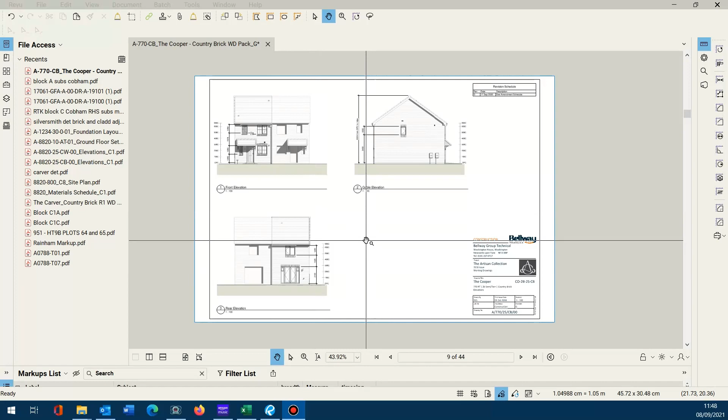This is the second in a series of demonstration videos that show bluebeam practical uses. I won't show you the whole process, just the pertinent bits, but suffice to say I'm doing a takeoff on a housing scheme. I'm going to take off this particular plot type. I won't show the whole takeoff, I'll pause and come back to the next section shortly and then explain from there.

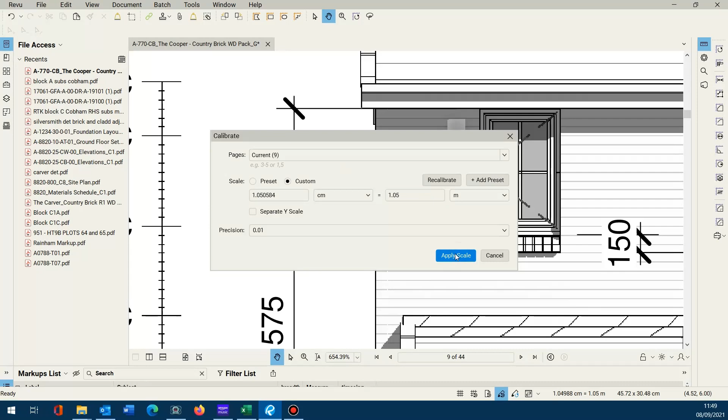So let's just get going with our takeoff, calibrate. The point of this video is to show you how speedy taking off with bluebeam is, and how speedy it is to get the output that bluebeam produces into a spreadsheet for you to then further manipulate. I'll come back to the rest of the takeoff once it's done. But here we go with taking off this house type. I'll see you in a couple of minutes.

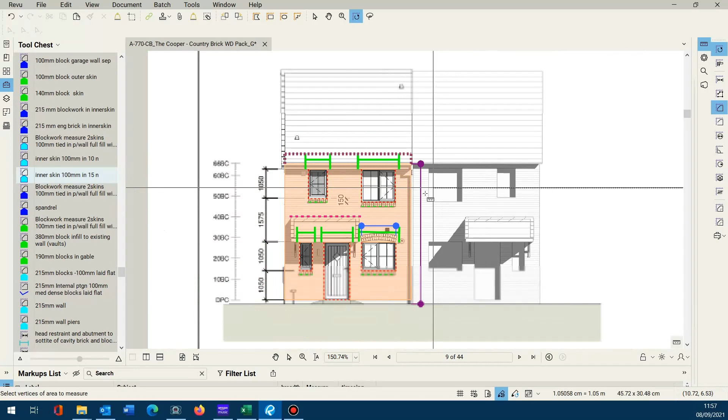Okay, so when I paused, the clock was at 11:50. It's now 11:57. So in that time, I've been able to measure up the facework, cut out the windows, measure the closers, measure the lintels, measure the sills, cavity trays, feature arches, wall plates, fire barriers at party walls, meter boxes, and it's all speedy because I've got the preset tools here, as I've explained to you before.

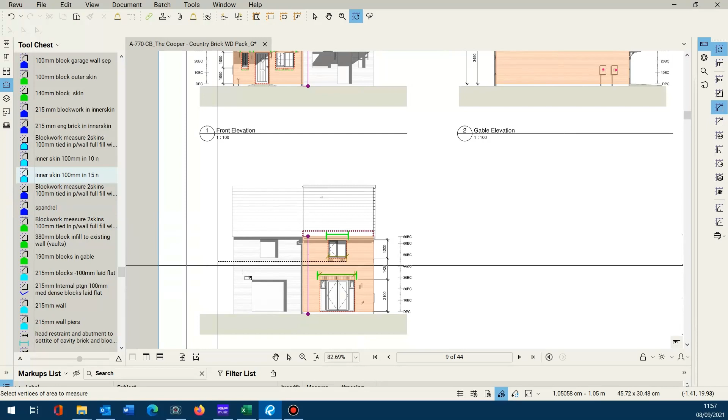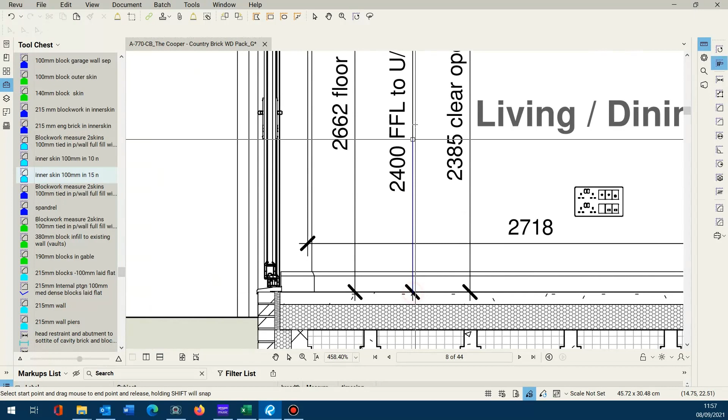Soldiers. Haven't actually completed this takeoff yet. I just need to grab hold of the party wall skin here. So if I just quickly do that, let's just calibrate this here. I have a tool for that ready to go. One half, and there's a spandrel in this gable, so I've only got to measure to the top of the rafter.

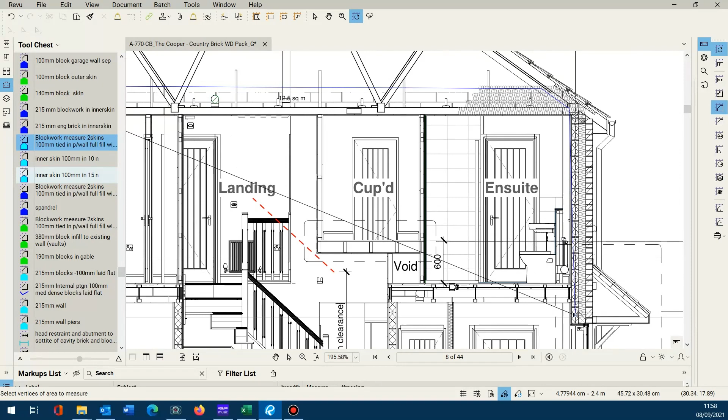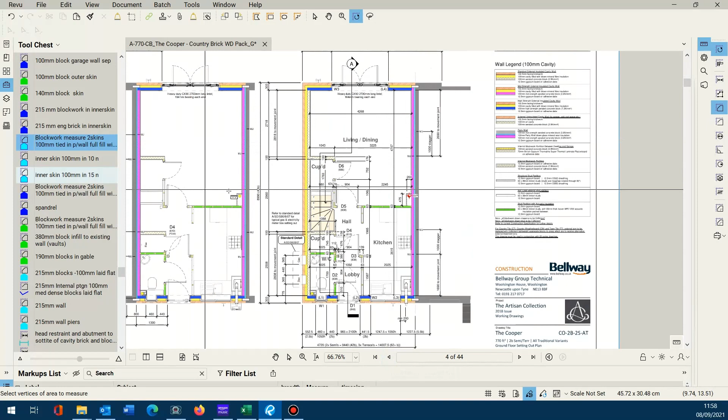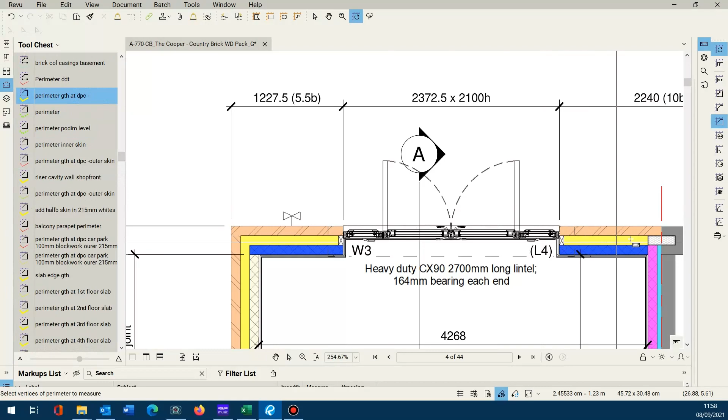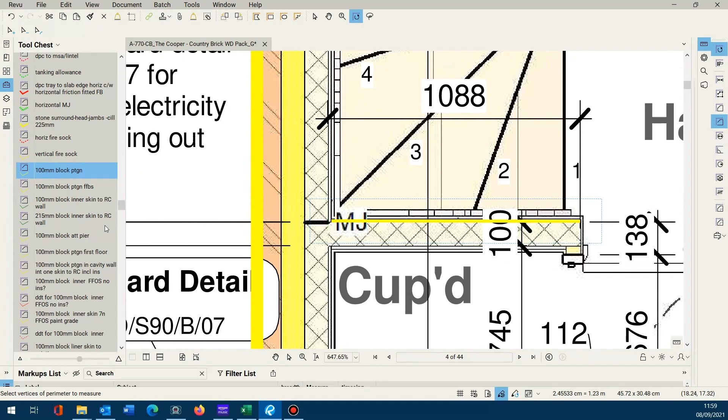I would measure any internal partitions at this stage here. Also, there's a small wing wall on the stairs. And there are a couple of movement joints internally on this. I'm going to mark those up as well, so they get picked up. So can't see any pad stones or wind posts.

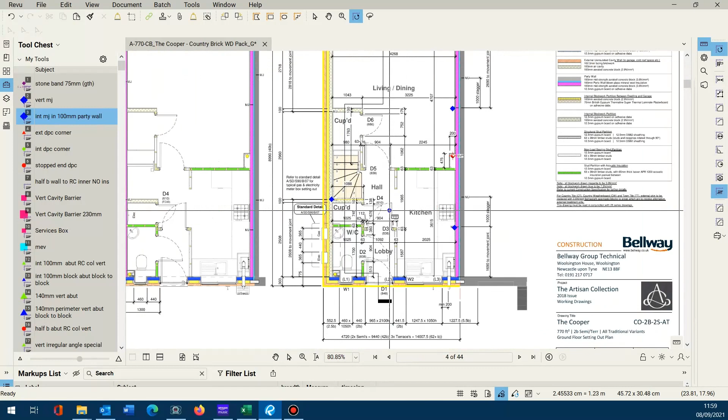So effectively, I've taken everything I need to take from this house type. So we need to get this out so we can include it in our summary pages. I'll best just check the first floor for wind posts and pad stones. Can't see any, no block work. So good to go. As you know how to export, I think I've shown you in other videos.

File, save as. And we're saving it into the takeoffs. Save. So we export to CSV.

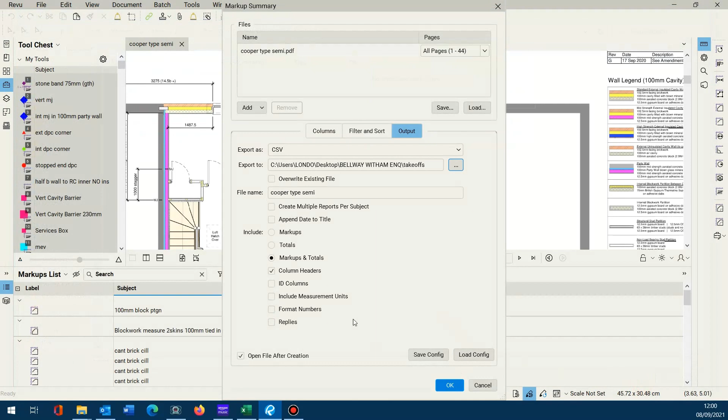Check the folder. Takeoffs. Select the folder, and we're only exporting the markups and totals. That's all we want.

Now, off screen, this popped up. I'm sure you're familiar with the output Bluebeam gives you, so I just save that, and I just know that that's a CSV file because that's what Bluebeam exports.

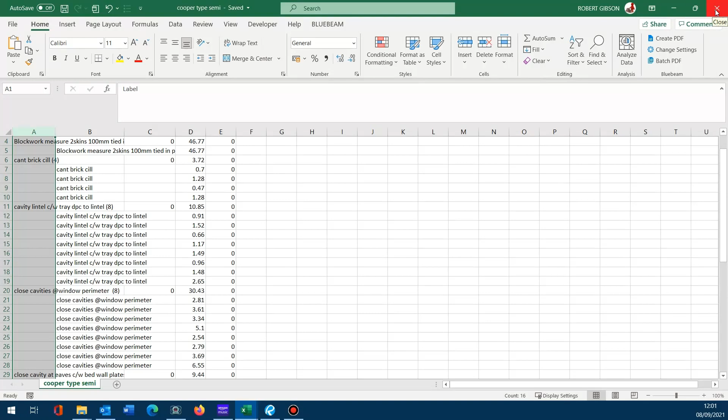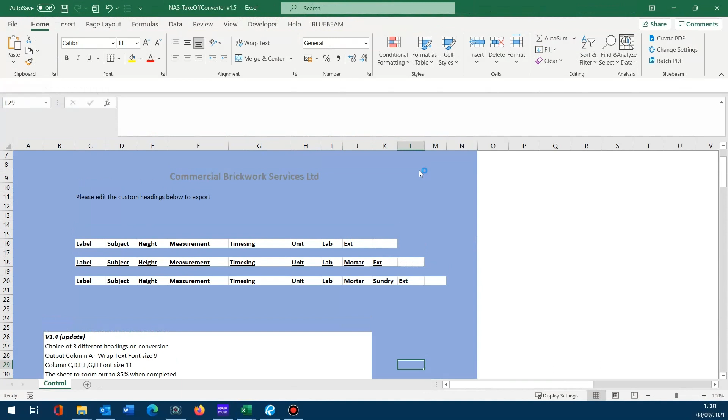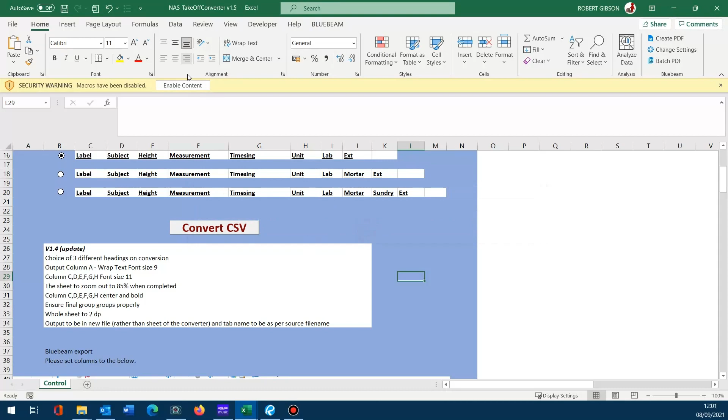What we tend to do is we have a macro built that speeds up the process. If I just show you that in use, current tenders, and we are looking for our takeoff converter, latest version. So that fires up. Sorry, it's opened off screen again. Drag it over here. So enable the macro, and effectively, I can't take credit for this macro, it was a colleague of mine. Enable the content, so convert.

You browse to the file you want to convert, and we were in desktop. We were in that job folder, we were in the takeoffs, and we just did a Cooper type semi. We click that, and what this tool does, it basically just puts everything into a more functional build type layout for you. It collates everything, puts it all in order, adds descriptions. There's a lot more you can do with this, but just for speed you can see that I've now got a Cooper takeoff that I can add to the others within the drawing pack.

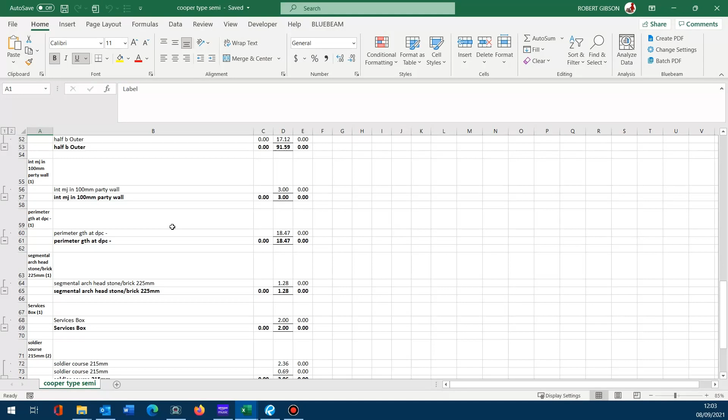So I hope that helps, and you can see basically I've just taken off that one house type in around about 15 minutes without any printing, without any spreadsheet creation. It's all done from pre-existing tools and just using a custom macro that aids the process. Hope that's helpful, and if you want to know any more, get in touch.